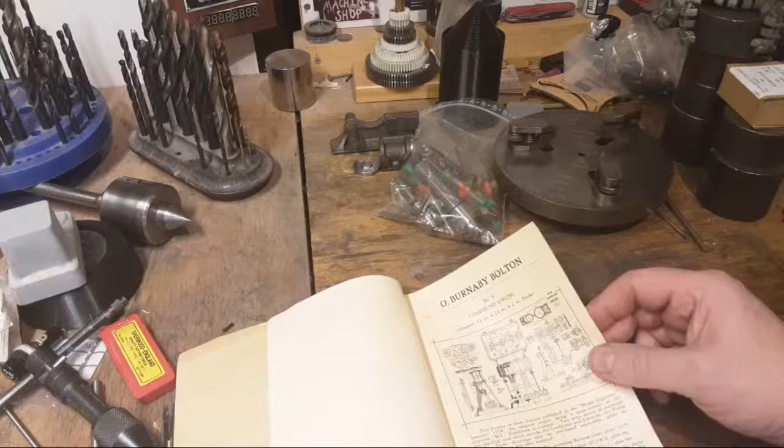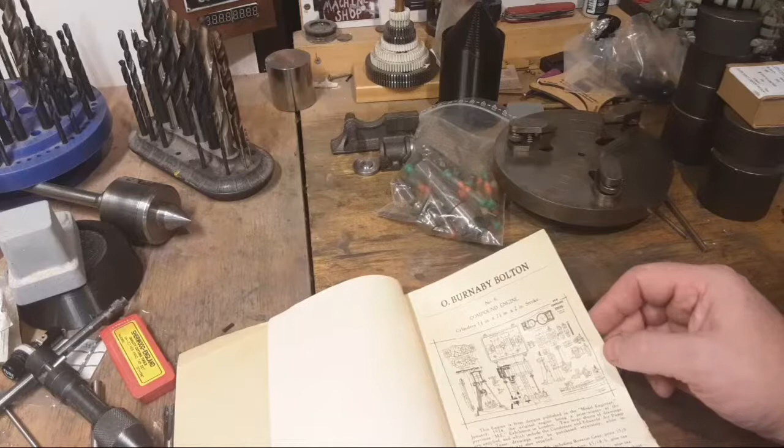Complete set of castings for building engines, £5, 18 and 6. 25 shillings extra for post, packed in a case and forwarded by agent, payable on delivery. I think it's a pretty big engine, that. Number 7, I'd love to build. I've got a set of patterns here for a number 7. That's a really nice engine, still available now. Not cheap.

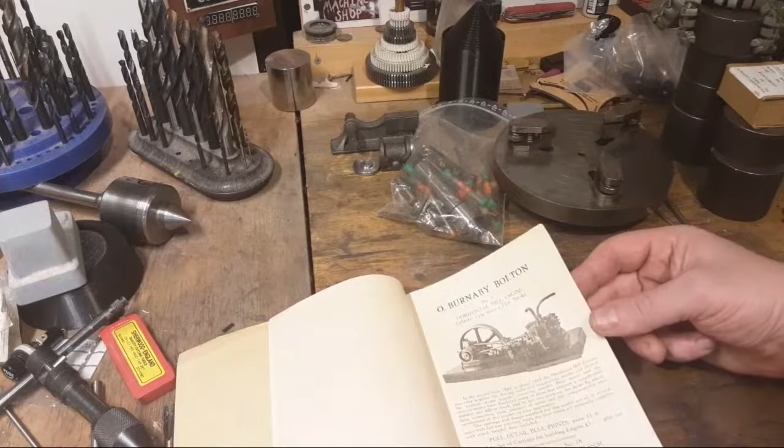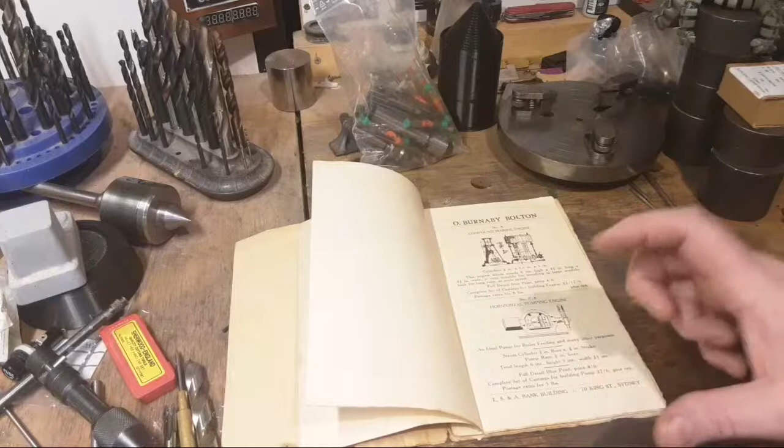Air compressor. Horizontal pumping engine, number 9 horizontal pumping engine. I actually have these castings somewhere. Half built, there were some issues with it. Probably one day I'd like to get in and get this finished, but it's only a tiny little engine. But pretty good fun, I think maybe one day I'll finish it. Bought them years ago.

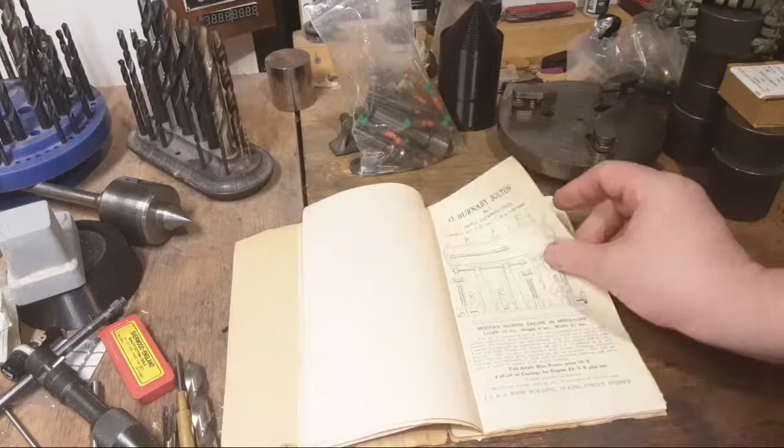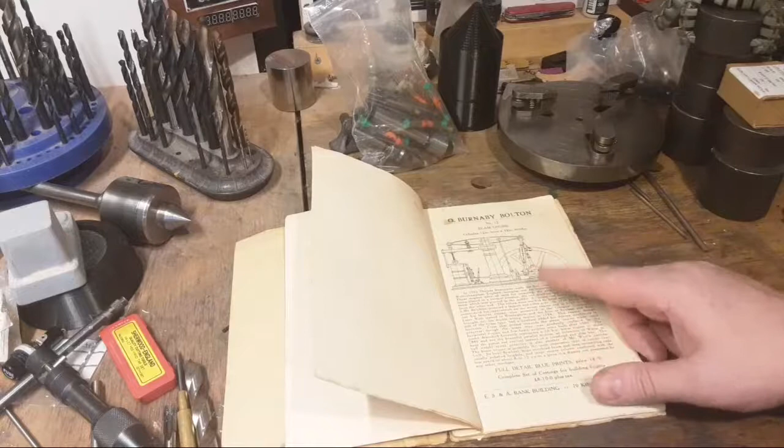Triple expansion engine, 7/8 inch, and a quarter, inch and 3/4, and inch and a quarter stroke. A lot of these were a knockoff of either Stuart models or someone else's. This is a big engine, number 12 beam engine. It is inch and 7/8 bore and 3 3/4 inch stroke with a 14-inch flywheel. Nice engine.

And verticals, which were Muncaster pattern, I believe. There were locomotive blueprint drawings in gauge O, gauge 1, gauge 3.5 inch gauge, 5-inch gauge. What else is in here? A lot of these were pure LBSC, ripped off. This is BAT, of course.

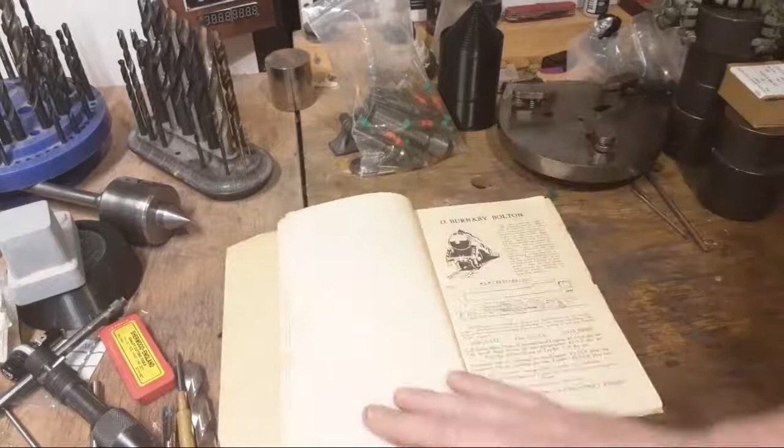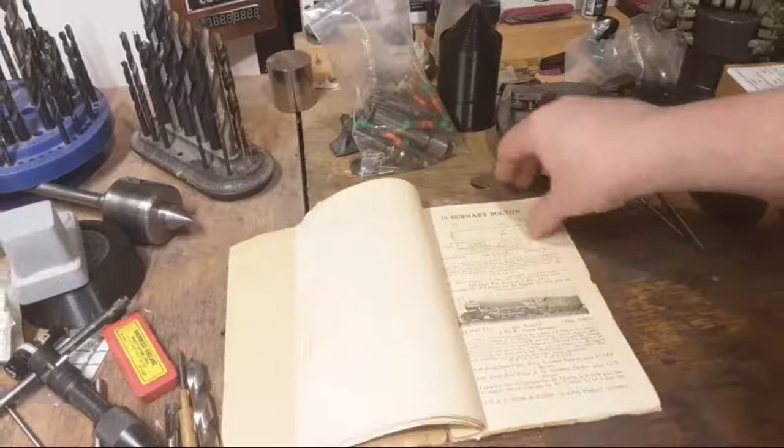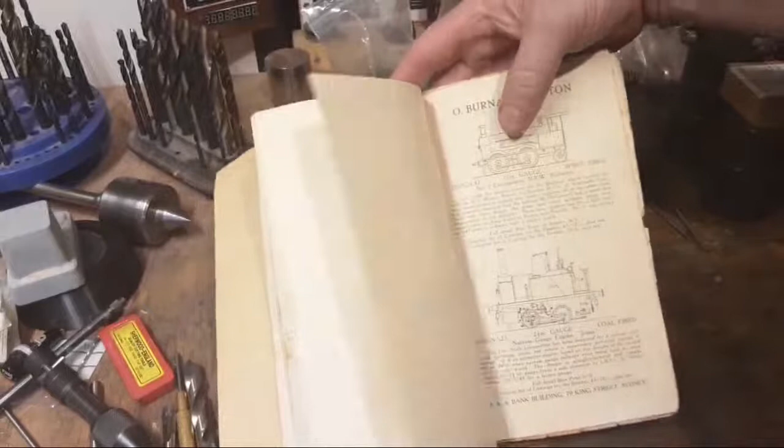Fayette. And there were some New South Wales designs too that I don't know how many of them ever got made. But there you go. There's some pretty cool stuff. O-gauge spirit fired locomotive in New South Wales Railways. That looks fun. Joan, which is basically 2.5 inch gauge titch, which is a bit small for anything.

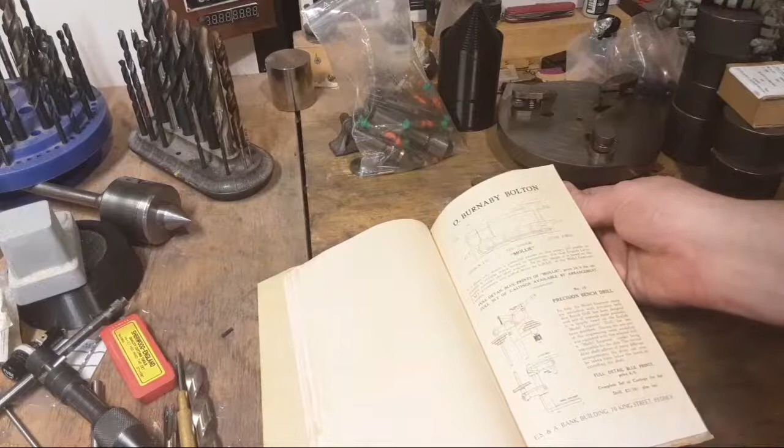A precision bench drill, which probably dates it a bit. Traction engine. Boilers, they sold a lot of stuff. Petrol engines. Fittings. Vertical engines and pumps. I guess in here somewhere there's the little pump that I just made.

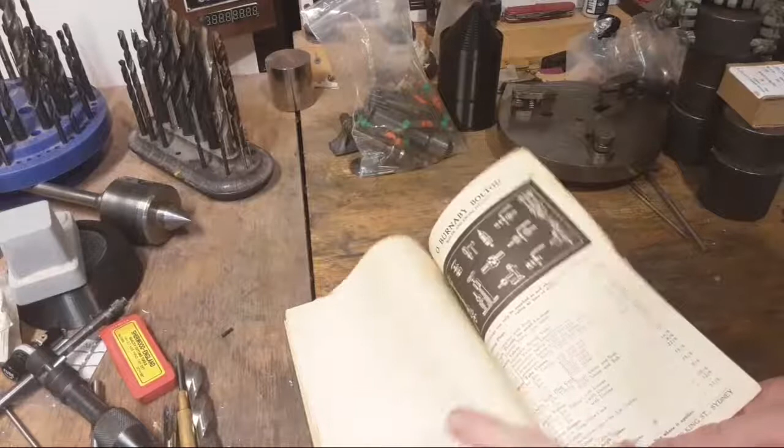But I don't know where, can't see it there now. So, all very cool. Got a Bolton catalogue from the 40s, 50s maybe. So anyway, there we go.

I like the beam engine too, but it's bigger than anyone's lathe that I know, so that's not going to happen. So there we go. 14-inch flywheel is pretty big.

Okay, this is a 3-dog faceplate. Self-centering plate faceplate, or a bridge faceplate, some people call it. Usually they're only about this big and they're built for watchmakers' lathes.

Absolutely, but it's not Schaublin, and it's not Lorch, I don't think. It's not finished right for Lorch - the sharp corners and things. But this is a pretty useful thing.

OB Boltons, yes, still in business. I built that little pump recently, it's a Bolton design. EJ Winter is their website. If you have a look, they've probably got the number 12 beam engine and the number 7 horizontal on their website, but they might be scary expensive. If you're emailing me, might get back to you. But it's certainly, you need extra workbench for a project like that.

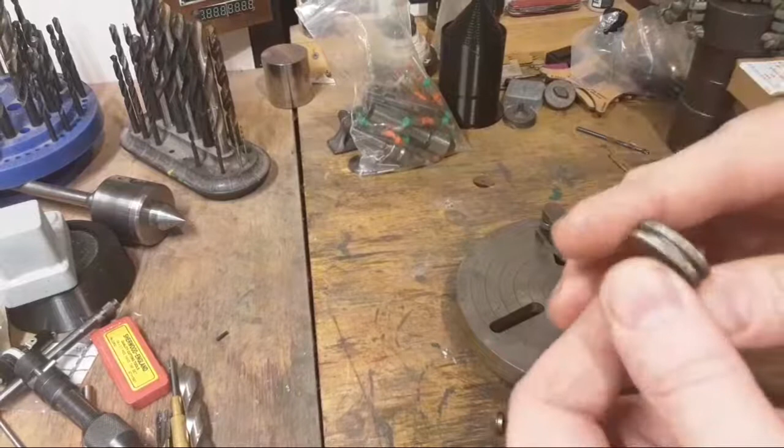Really nice. It's got knurled nuts that all match, and they're all really nice. They could do with a trip in the ultrasonic, but straight knurls on them, and matching hardened spacer washers. This is spring loaded and it's got a pin. Could all do with a clean up.

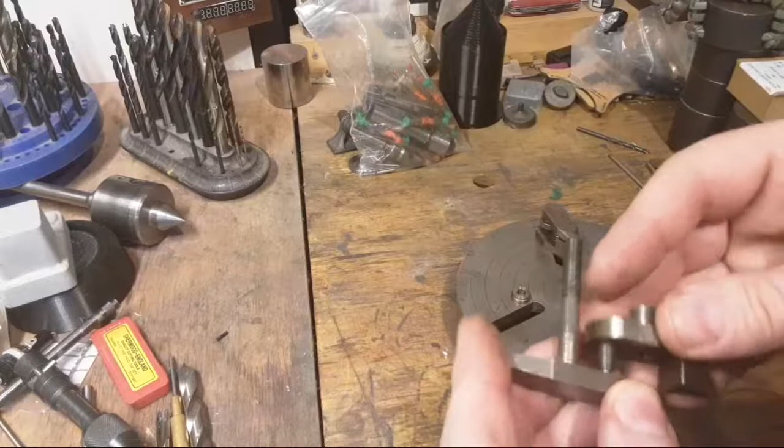And this has got a riser nut here, so like that. And this is a nice beautiful sliding fit there, and this one's a sliding fit in there. So these two slide together like that with a spring between them. And this nut here - which way up did that go? Now I've taken it apart without looking.

Looks like the double. It looks like they're probably the same both ways. But this probably screws that way up. Yep. And this adjusts the height. Then there's a coil spring in there, which goes between there, and that's clamped down like that. So you can adjust the thickness of the plate and then use this to clamp it down like a toolmaker's clamp. So pretty specky thing to have.

Look, you can find anything if you search for long enough, Paddy. This is missing the pump center, which was used for lining up the back hole in a set of clock plates or watch plates. If you're making a new bridge for an oversized watch or something that big - it's really not designed for this sort of work, this big one. But if you're making a new bridge because the old one's damaged or bent or they get abused, you can make it fit the hole and set it all up and make it to shape. And then you can set the plate up in here on centre from the rear and bolt the new bridge on and drill and ream the bridge in line.

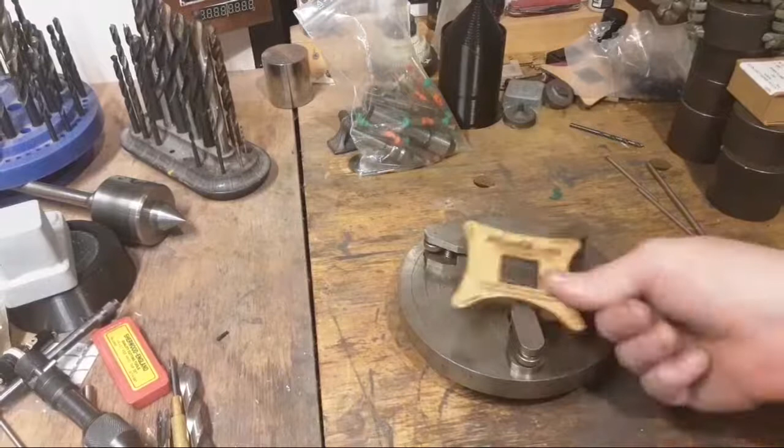The reality is that the straight slot faceplate is a lot easier, I think, to set things up in, mostly, because mostly what I'll be doing is making a - so you got a plate like that, and you want to bore a hole in the center of it. Shout out from JB.

This is pretty easy to set up in there on any center you like, without any problems. And it doesn't really matter because it should have a spring center from the back, so you can set it up fairly nicely from the other side and bore it, or you use a wobble bar in the center here, or a DTI to get it on center from the front.

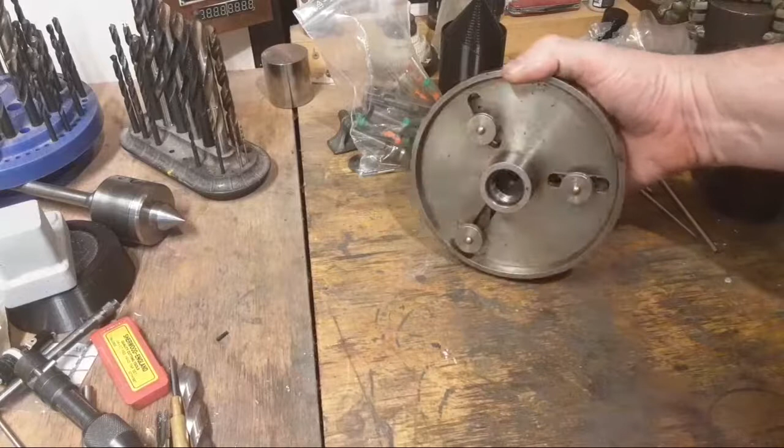This came via Stefan, who was kind enough to post it out for me. This was posted second week in March, maybe third week by the time it got out. Unfortunately there was also a week where we were about a week too late, and German postage shut down international letters, so it got sent back. So I've been waiting for this since March, and it's finally here. Stefan had been sitting on it until about a fortnight ago, and now he's sent it out again, and I've got it.

So that was exciting. There's this bag of stuff from Stefan. Bragging rights, not really, but there's some cool stuff here, and I'm pretty pleased to get this. Haven't really even looked through it. I know there's a couple of nice little tool holders he's made at some point, surplus to his equipment requirements I believe. They're really nice, I'd like to make some more of these. It's a pretty cute little design, and it fits my lathe just spot on.

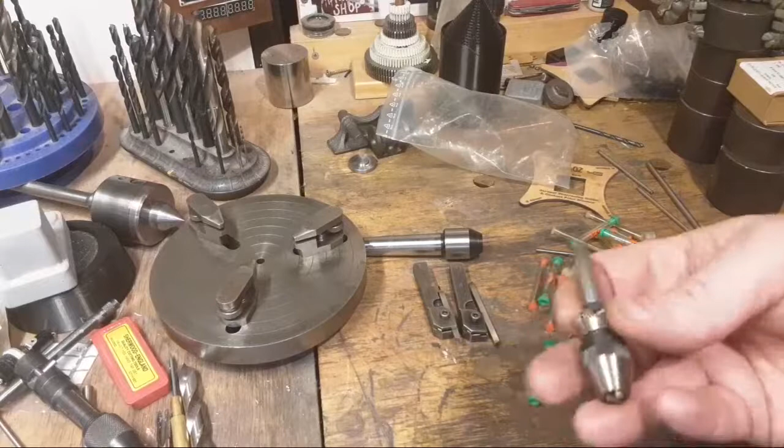So there's two of those. There's a Morse taper end mill holder, which will be just awesome for my milling machine. And there's a little German keyless scroll chuck that will probably find a use for something. I wouldn't mind making a floating holder for the tailstock out of that.

There's some carbide, which is awesome. These are mostly, I think, carbide - end mills and drills and a few reamers and things there. Some of them might be sharp, some might not, some probably broken. That one's a boring bar - how cute's that? Pretty exciting.

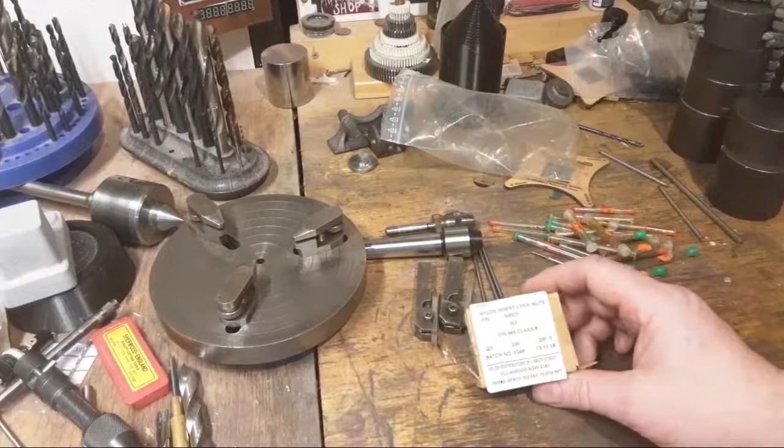Anyway, I said, how much for a box of 200? How many's in a box? There's 200 in a box. It cost me $6 for 200 of them - they didn't have to count them out. That's $6 Australian, about $4 US. So if you go to your local, ask how much a box of something is, because quite often if it's a common size it's not crazy expensive, and usually a lot cheaper than buying half a dozen. But yeah, lifetime supply there.

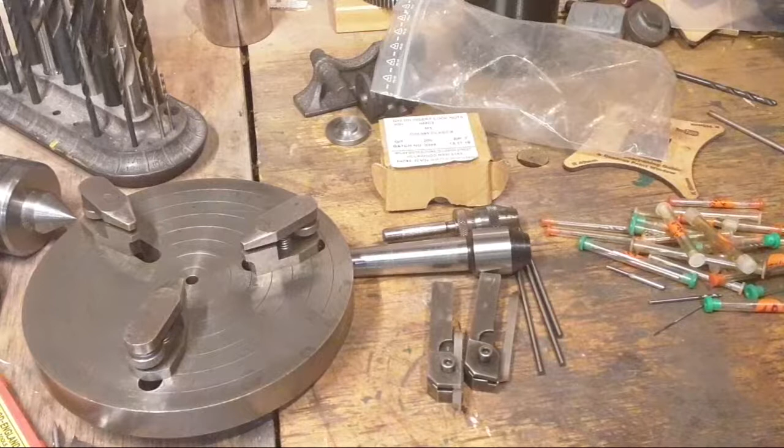So it's coming - it's not a boring bar. I've got 2 or 3 Solid Rock boring bars, and this is something I said I would really, really like to buy off him at some point, and he's made the effort of sending it and won't take payment in any form for it. So I'll be surprised when it comes. It might be here next week or it might not, and we'll do an unboxing video. I might do a separate video on unboxing it because it is pretty special.

And here you go again about this - everything tries to kill the mailman. Mailmen are almost invincible here, Paddy.

You probably should - there's a short film or feature film called Mailman of the Birdsville Track. Probably worth a look if you're worried about our mailman.

Someone might know the name of that. What was his name? Was it Bert? No, same name as a movie star.

Anyway, Mailman of the Birdsville Track, and some of the fun that they had - they made a film about it, it's well worth a look. I really hope it doesn't come by... The Back of Beyond, 1954, Tom Kruse.

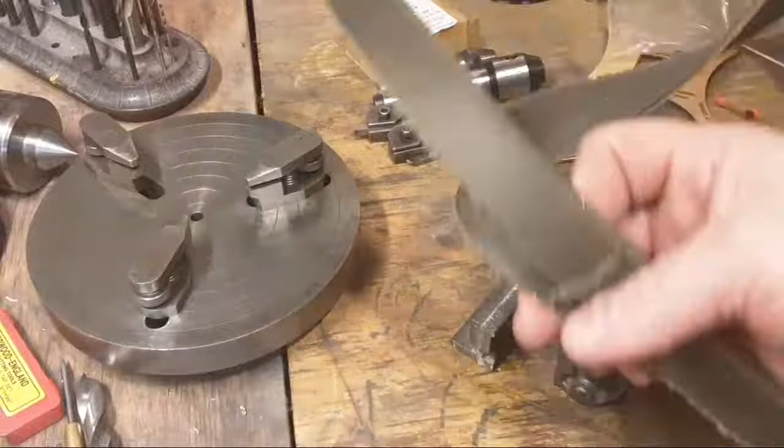New flat belt on the lathe - it's pretty awesome. This one has been giving trouble for a while, it's a bit frayed and a bit awful. A few of you have commented in the past that it's starting to go. I'm a bit economical with this belt because it's really hard to get here in Australia. This is a rubberized nylon belt, a rubberized canvas belt, and it's really pretty good.

This one's had that bump on it from new, and I don't know what that is, but it's been playing up. It's been a bit ordinary for a while, and probably could have shortened it up, but it was getting on a bit, so I put a new one on.

This belt flying off at 500 RPM really isn't a particularly scary thing. It basically just falls off and bangs you on the head or whatever - not even, the lathe just sort of stops and it falls off. It's not a huge calamity. And that's what I like about flat belts, they are a lot safer than V belts, I think, probably.

So anyway, I think this is probably an S50, a Stuart S50 casting. It's not the right one for this particular engine. And having said that, this is a reproduction of the original kit, and it's got a few holes in the whole process, really.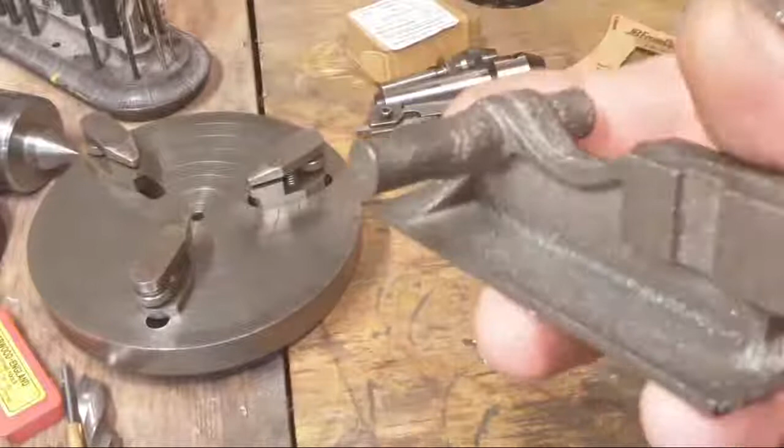Chirpy. It's not a bad little casting, actually, looking at it, right? If we get up close. There wasn't a lot of finished sand involved, right? I've seen better castings, but they are nice and soft. And a lot of this is just parting line that needs to come off here. And here. If you have a look, it's not, there's not a lot of extra metal on it. So it's probably not a bad casting, but it's definitely a casting. It's not as nice as I would expect from Stuart models by any means. It's all right.

These are castings from Stuart models. Yes, it's the kit from Stuart. This is probably the cheapest kit they actually make. So the catalogues, older catalogues, 60s, 70s catalogues, had quite a lot of information about their castings and how they were all shell cast and how wonderful they were and how good their foundry was, etc. That seems to have been dropped from their later catalogues. Certainly this isn't a bad casting either.

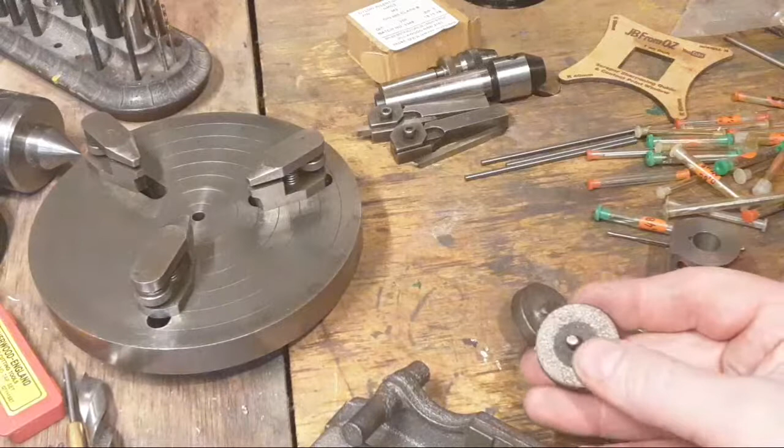These are the real time killers, because if you have a look, while that lug is probably on center, it's not particularly uniform shaped. This one is definitely off center. It's down this way a bit. So that makes it almost impossible to use this as a work holding device to machine the outside. So there are ways around that. And this one's got the same idea, is that you machine this using this lug here to hold it while you machine the back, and then you hold the flange when it's machined and machine the front. But there's not enough meat in this to hold it either, to be honest, to machine this without it spinning in most chucks. So these are the time consuming little castings.

Will it be completed, Paul? We'll make a big hole in it. I'd like to get this cylinder finished by then. See how we go, see what else comes in. But seriously, there's 4 or 5 hours in that.

4 hours probably getting that to that stage. A weekend should get these on and a piston in, I reckon. A day next weekend, get these on here, a piston in it, and probably another day in that. If I got in for 3 days, I reckon we could have a go, but I'm probably not going to make that commitment.

But yeah, the answer will be to get the flange plate centered. That's actually in the middle of the casting, which is kind of nice. Set this up here, and there are ways to do this so that it's a good job.

Haven't even looked in the book to see what's actually written in here about it. There's only about 2 pages in this book that actually cover this engine. It's quite a thick little booklet, but there's not much information about it at all. There's the vertical version and the horizontal version. Look, I haven't really even looked. There's a little bit about machining the flywheel.

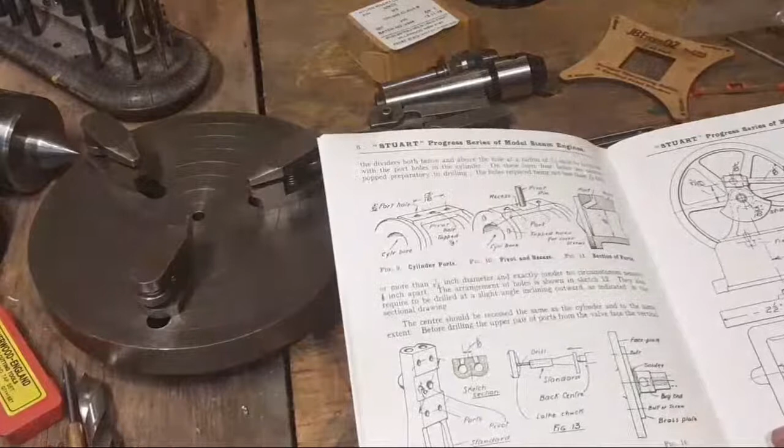Probably going to use this new faceplate for that. This base and pedestal for this engine, there's very, very little written about it. It's got a diagram for marking it out, which is next to useless. It's got instructions for holding it on a block of wood with a backstock in the lathe for drilling the ports.

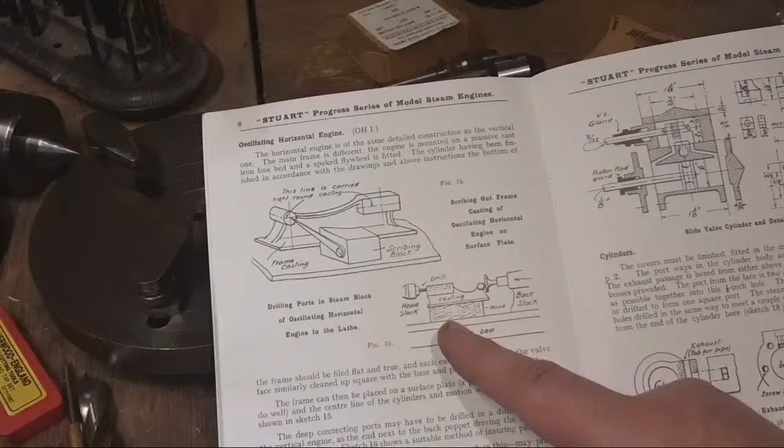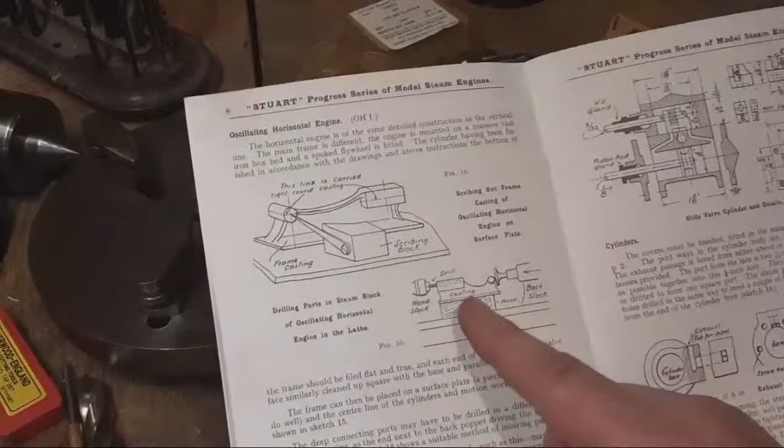You haven't seen sketchy until you've seen model engineering setups from the 1920s and 30s. That's sketchy, but I guess it works - push it along with the tailstock on a block of wood to drill these. Not sure about that. But this was sort of built with the intention of being built with a lathe with no milling machine, really.

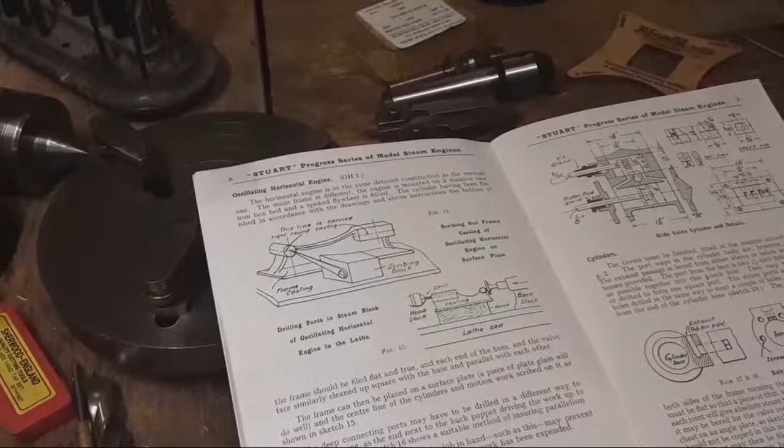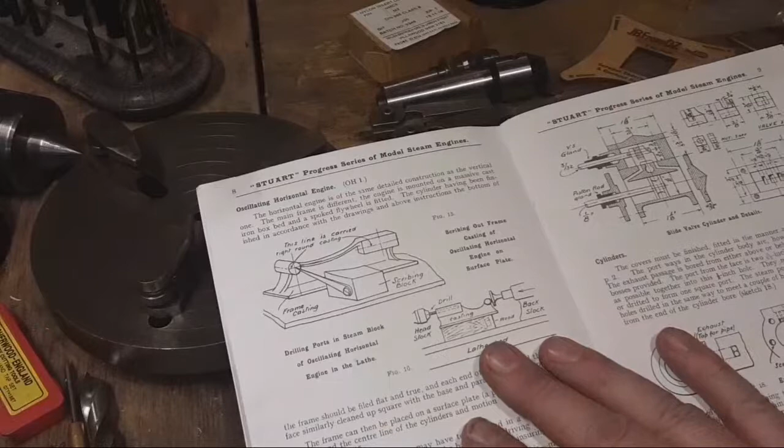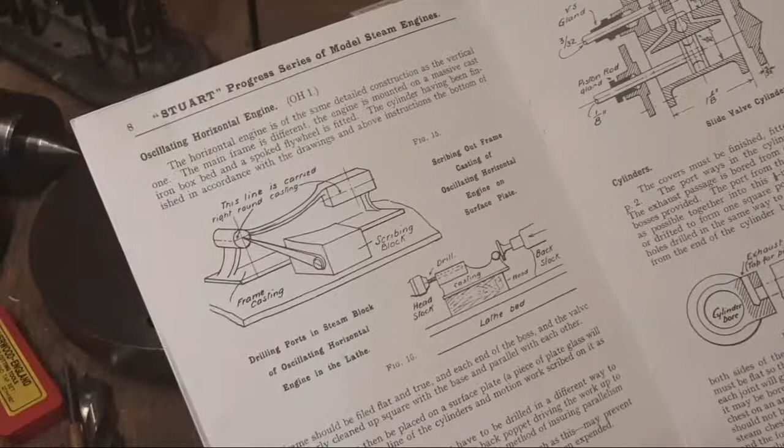Yeah, it's the way that these things were built on very early lathes. A lathe that the person would own that would build this engine in the 1920s was probably a wood lathe with some extra additions. It might have had a micrometer, might have had a vernier or something like that. Probably had a set of number drills if he was lucky. He might have had some taps and dies.

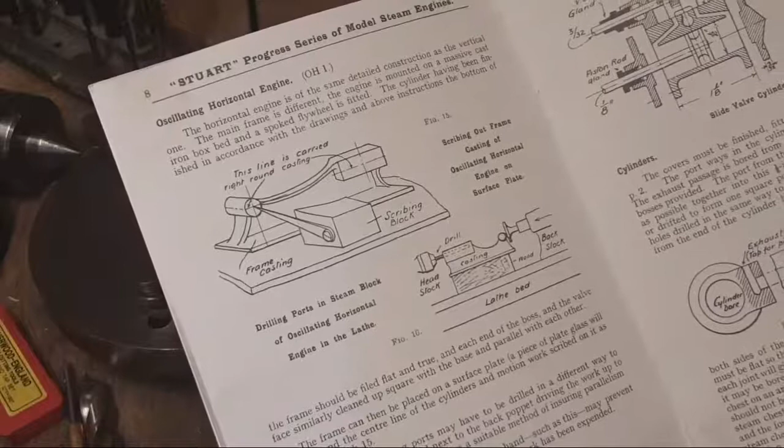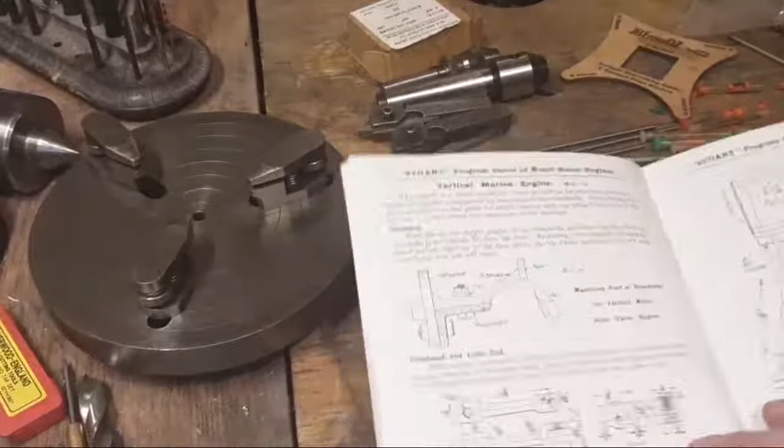I don't imagine hardware store taps and dies in the 1920s were any better or worse than hardware store taps and die sets in 2020. It was whatever tools you could buy down at the ironmongers or the hardware store, and a lot of these setups were really - you sort of did what you could with what you had a lot of times. There's machining the vertical standards on an angle plate on the face plate, yeah, stuff like that.

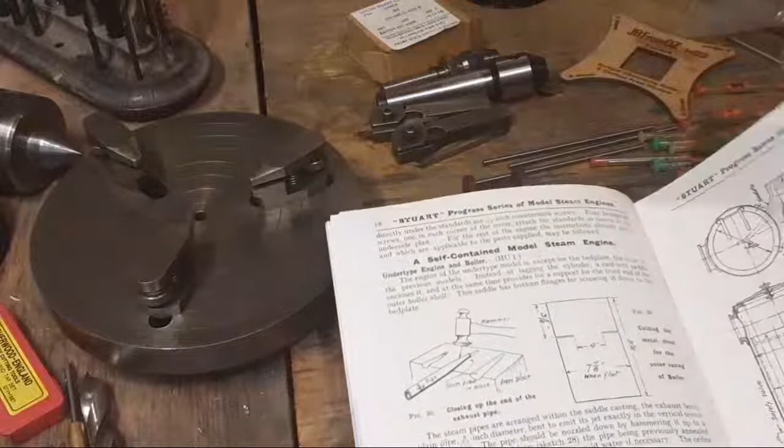So yeah, that's how things were made. So we'll sort of try and keep to the spirit, but we try and keep to the spirit of the thing and do it with the same sort of thought processes, that we make an engine that'll run and bits that fit together, rather than something that's dimensioned to tenths with ISO tolerances, because there isn't any tolerances in this. It's just like the closest tolerance is about a 32nd of an inch. I don't think there's any 64th dimensions on it, and that's 0.016th of an inch as a 64th of an inch. So pretty basic thing.

Try and keep to the spirit of a 1920s engine build, and it'll still run. That's all it needs to do, and it'll run nice, I reckon. Cylinder tolerances and piston tolerances, valve tolerances, things like that are probably a bit more important, and we'll go into them a bit, but I reckon I can get a pretty big hold on this in a couple, 3 or 4 videos.

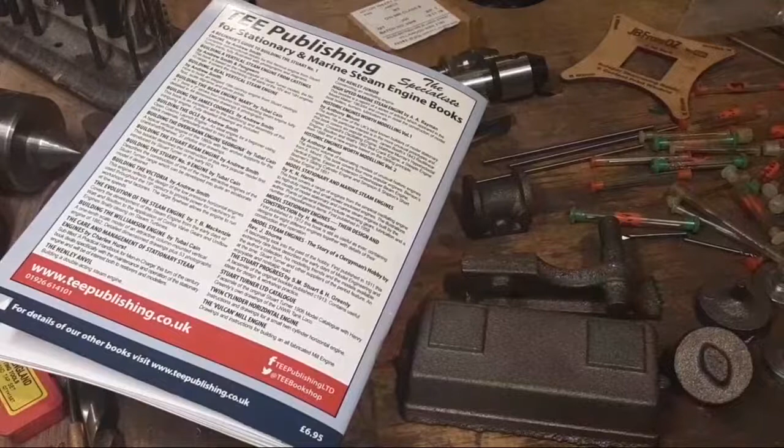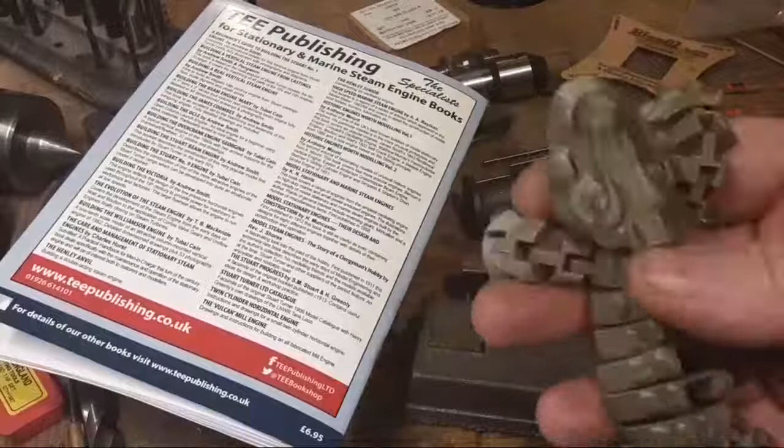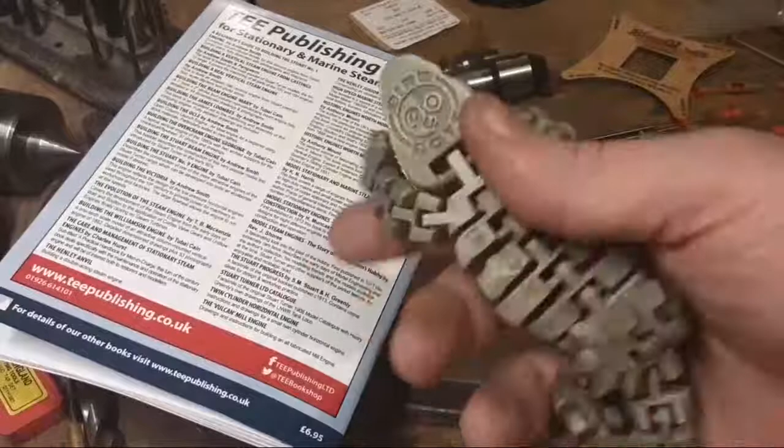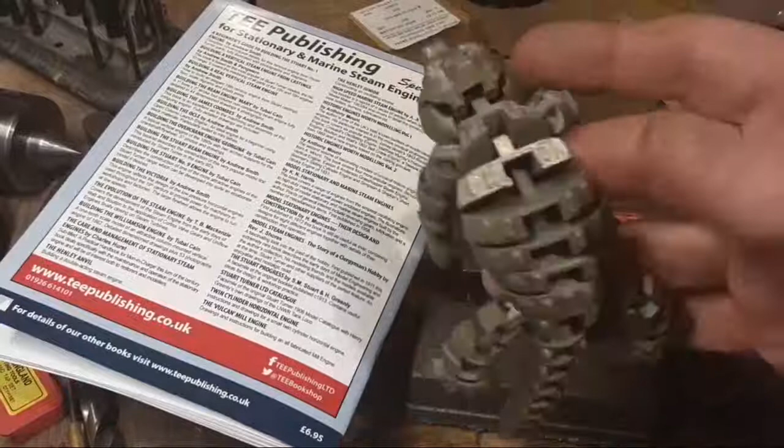We've got a 3D print crocodile. How cool is this? A complete waste of plastic, but all printed in one piece, all flexible, all loose joints, not clipped together afterwards. Pretty cool. I don't think of any other way you could possibly make it, but there you go. It's all done in one piece.

Patty's still on at that. It's a crocodile. There's no crocodiles in Australia except for the dangerous ones and the ones in the rivers and things. But apart from that, there's no crocodiles. There's none here in the river that I've ever seen. Floods, it's a bit different, but at the moment, there's no crocodiles.

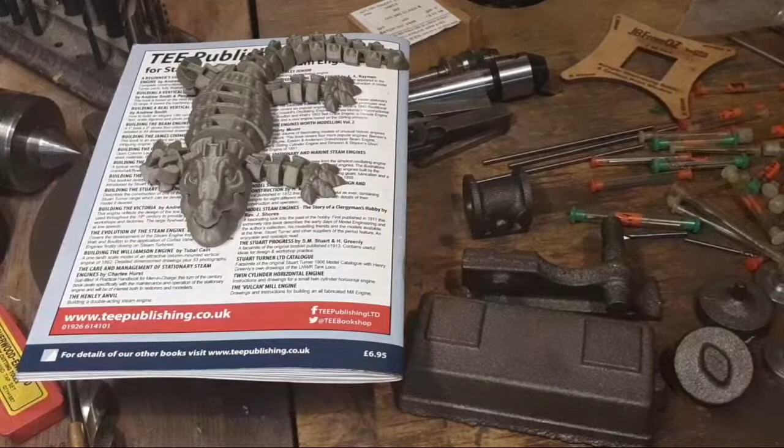Matt's right to a certain extent that the old stuff is better. Look, I don't entirely believe that. I'm just going to reach in front of the camera here, and we'll fish some tools down that come with my shaper, which are up here for display and interest's sake only. Hang on. Here we go. The set of tools that come with my shaper.

Plenty of crocs here. Yeah, I was going to say that there's no crocs except for the ones in the river and the dangerous ones.

These are all forged tool steel, high carbon steel. Probably that one didn't actually fit in here at any point - I thought it might have, but it doesn't look like it does. Most of them are broken, and some of them are pretty awful. Some of them have been used in a pinch because I needed one. Some of these I would really wonder about.

This one may or may not work. It looks like it's been snapped off. It might not have been. Not sure about that. This probably potentially was a pretty good tool until someone did a job on it. I think these were probably genuine Drummond, some of them. I'm not sure about that one. But this is probably a pretty good tool, and it gets a bit of use, and it's probably all right. I know Chirpy uses a lot of these, and they're all right, absolutely.

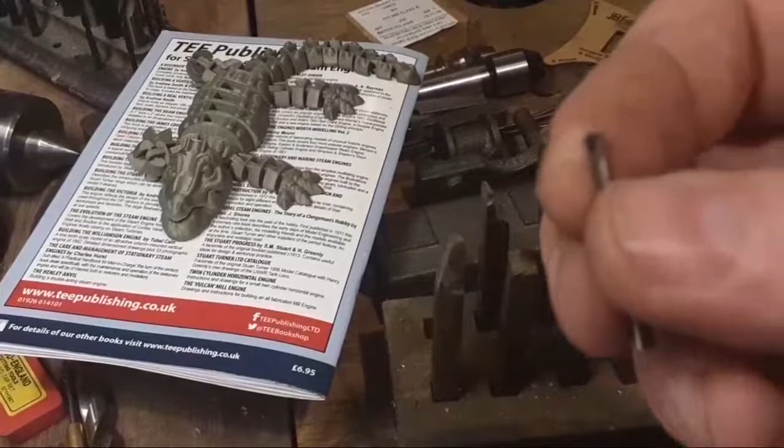But when you say old was better, I don't believe that. As you look here at some of this stuff, this carbide boring bar that Stefan's ground up - I bet that cuts nice. And you can buy a nearly equally as good boring bar out of China for next to nothing in carbide. That's pretty awesome. So I'm not inclined to go along with that old is better thing for a lot of things. I think you can still buy good quality, or better quality than you could ever buy before.

This isn't going to focus, is it? Ever. Sorry.

Craig's right, I'm still in that party. If you want my opinion on 3D printing, I've got a printer that will actually do this - no support, no nothing - and will print this fairly easily without a lot of hassles, doing a lot of this sort of thing with this sort of detail.

There's a little bit of string in there if you have a close look, but nothing serious. I like it and it's good, but it's still only a tool. It's fun to sit down, leave this printing, come back and peel this off and have a proper crocodile that needs his tummy scratched. But I'm not really sold on it for pattern making, or for anything of any particular use or quality.

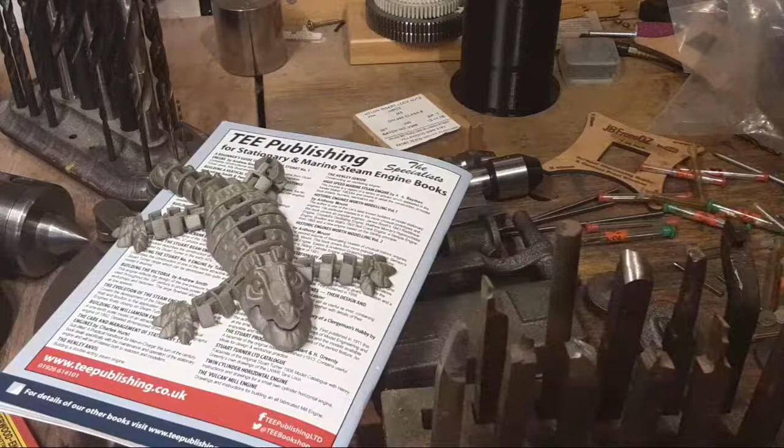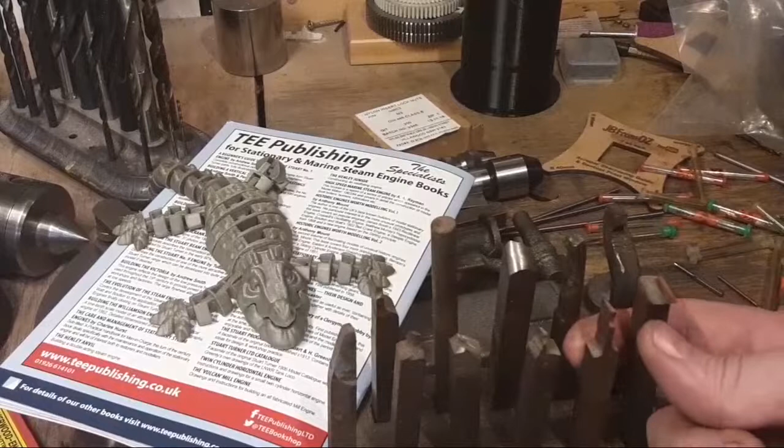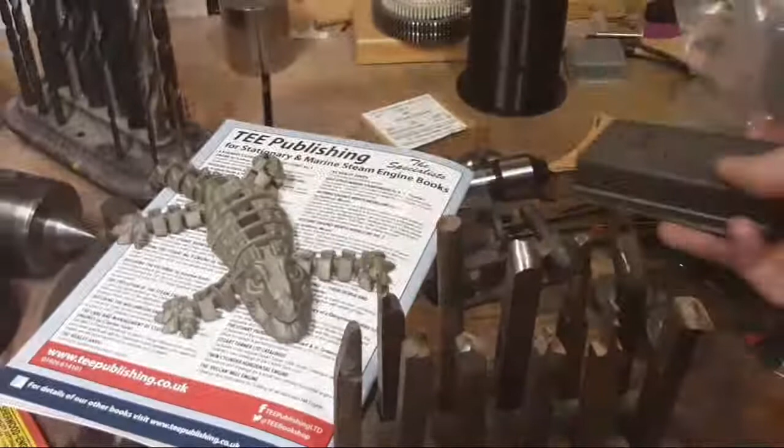So there we go - don't know if there's any real argument to go into there, but this is the sort of gear that someone who was lucky enough to have a shaper in 1920, making one of these engines, could do this on the shaper, you know? I could do this on the shaper. We'll see how we go.

This is the sort of tools that would have come with it - this great lump of lignum vitae or blackwood or something on it. I don't know what it is. It's pretty heavy, really heavy lump of timber. Maybe it's just oil soaked, but I don't know what it is. Could be blackwood.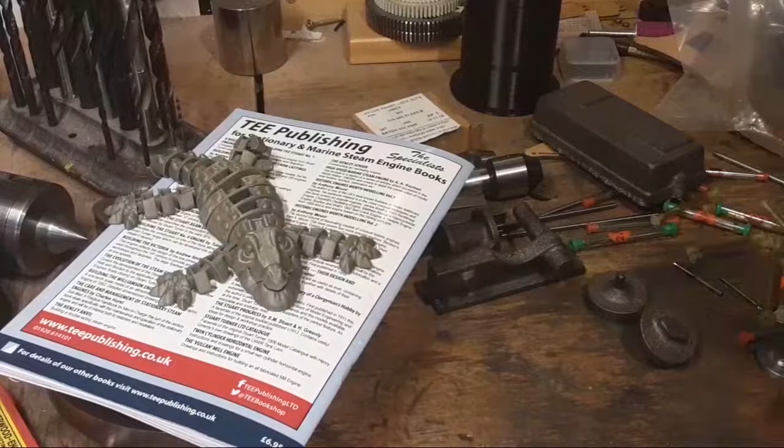I've just smelt that - I know exactly what it is, which is a bit strange. Let's see how heavy it really is. But it's not what I thought it was. Maybe it is just seasoned. Nah, it is - it's definitely huon pine.

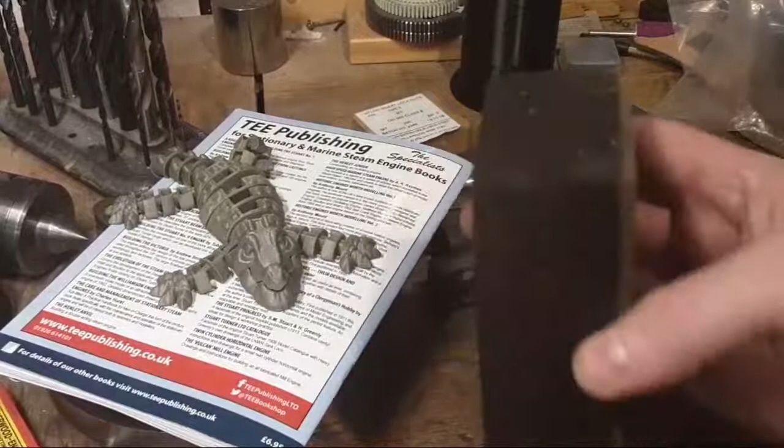Really want to give that a rub on the linisher and see what it comes up like. Didn't know that - it can't possibly be anything else. If you smell that, you can't possibly mistake it for anything else. It's pretty solid, pretty dense bit of stuff, and it's probably just well aged. But it's definitely huon pine. So there you go.